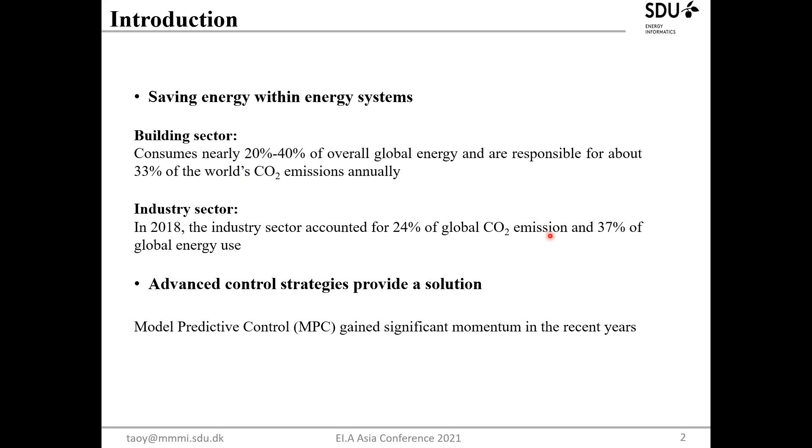to give some background of my PhD project, my project focuses on saving energy, and it has been spotted that buildings and industry sectors are large energy consumers and also release a large amount of CO2 emissions. In this regard, it is extremely important to increase energy savings for both sectors. Our approach will be using advanced control strategy, particularly model predictive control.

So what is model predictive control? I will give an example of building MPC, the model predictive control application in buildings. Consider that we are trying to regulate the temperature in the building and at the same time save energy. As indicated by the name of model predictive control, we will need a predictive model, which is also called the control model. And this model can accurately capture the thermodynamics of the building for a given optimization horizon of 24 hours.

For instance, at the current time step, the control model will predict the building indoor temperature for the next 24 hours. The optimizer will use the control model and constraints together with the cost function to formulate an optimization problem. The MPC optimizer will output the optimal control sequence to the actuator, which in our case will be the HVAC system, for the coming 24 hours. But instead of applying all the control sequence for the next 24 hours, it will only apply the first time step, which will be 1 hour.

And at the next time step, the measured temperature from the building will feed back to the optimizer, and the optimization will repeat. So basically, the characteristics of MPC are a predictive model, a rolling optimization, and a feedback correction.

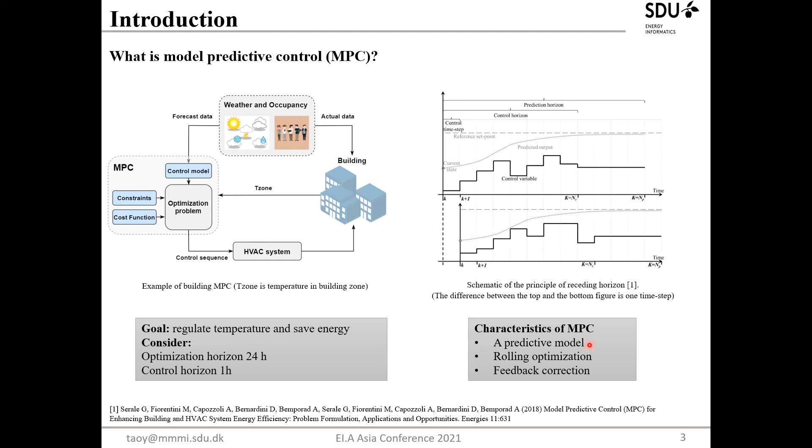Why are we using model predictive control? To mention the benefit of model predictive control compared to conventional control strategies, such as the PID controller: if we are using the PID controller, the system will only react when it reaches the unexpected condition. But for model predictive control, since we have a predictive model, we are able to predict future states, and the system can react in advance to avoid the unexpected conditions. This makes MPC extremely good at dealing with large scale energy systems with thermal inertia, such as buildings, big thermal storage tanks, and other industry energy systems.

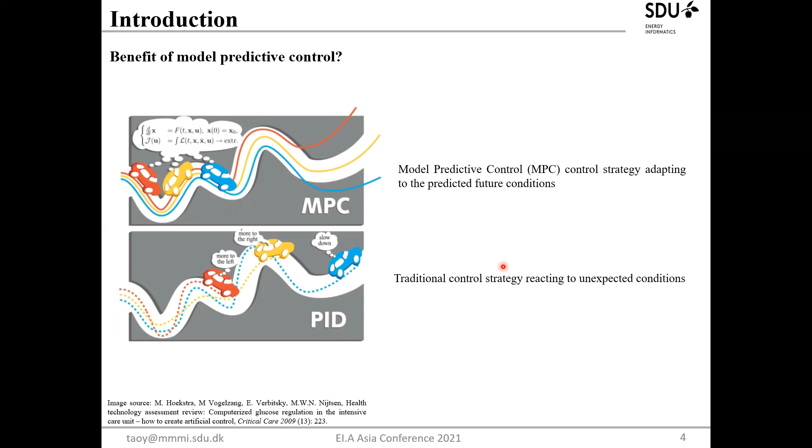In general, MPC implementation can be divided into 5 steps, starting from developing control models, defining the cost function, selection of the optimization techniques, and ending up with testing and commissioning of MPC. In these 5 steps, choosing a proper control model and optimization technique, these 2 steps are kind of hard, and they are normally chosen according to research experience. This fact brings up the research question for our project: is it possible to find the best optimization technique for a given type of energy system model?

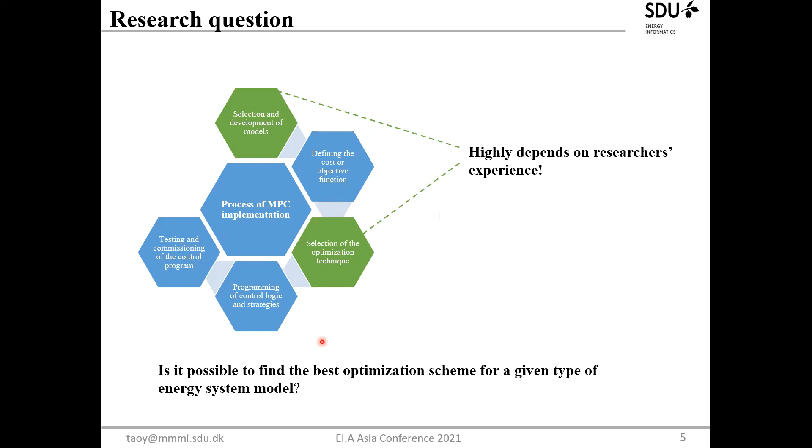To answer this question, we need to know the status of the research, the state of the art. What is the research status of MPC in combination with optimization techniques? Here we present the state of the art for one typical energy system, which is building MPC, rather than covering all the MPC applications in different energy systems.

In regard to building control models, they fall into 3 different categories: white box, grey box, and black box. White box is built based on the physics of the system. Black box is built purely based on statistical data, while the grey box approach combines those two. The grey box model is actually quite a commonly used control model for model predictive control, and in particular the RC network model, which is a resistor capacitor thermal network model for buildings, is quite commonly used. Here is a picture of RC networks of different orders.

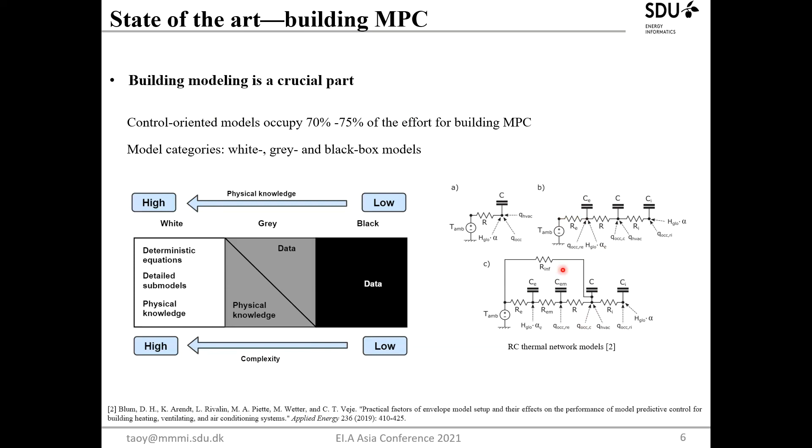As for the combination of MPC models with optimization techniques, basically the literature shows that for research studies, they use a specific MPC configuration applied in specific building energy systems. And there is still a lack of guidance on which MPC configuration will perform best in general. And these facts result in a slow transition between the wide research activity in academia and the real implementation in industry. The picture here covers all the aspects that need to be considered for building MPC.

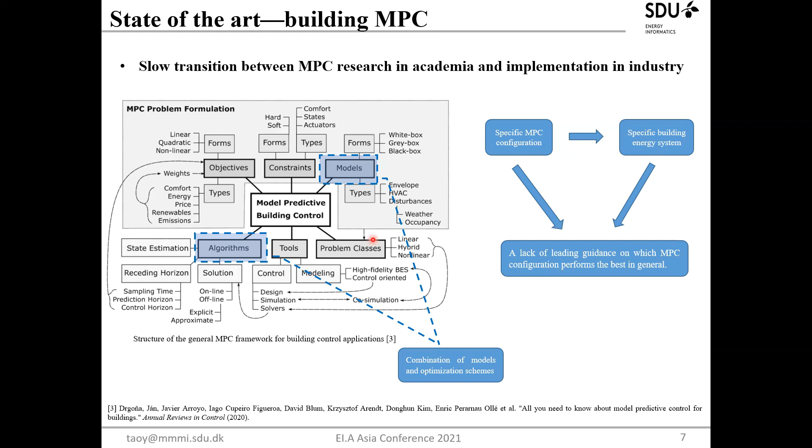Researchers have done a lot of work on different branches. However, in regard to the models and optimization techniques, there is still something missing. A systematic study on the combination of the models and optimization techniques is still missing. So to answer our research question, we will investigate 3 case studies for our project.

To start with, we will do first the building MPC. First of all, a comprehensive literature study will be done to map the control models, the optimization techniques, and their combinations, and also include the possible available KPIs for performance assessment as well.

Next step will be developing a building virtual testbed that enables us to make numerical experiments on. We will use this virtual testbed to test a matrix of model types and optimization techniques, and compare the performance using different KPIs. Following this step, a real MPC implementation in a real building will be carried out.

With the help of the 3 steps here, we expect a comprehensive methodology on how to choose models and the corresponding optimization techniques will be formulated. This methodology will be further applied in other 2 case studies, such as greenhouse and district heating networks.

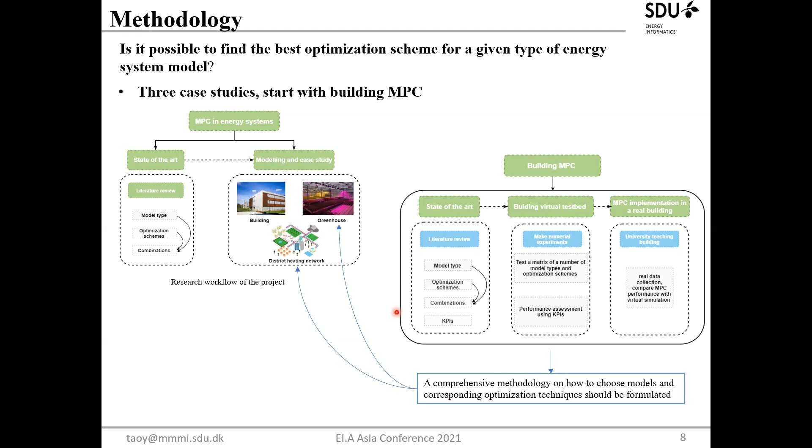So until now, one may ask, do we already have a building virtual testbed available to make numerical experiments on? The answer is yes. At SDU, we have a Python-based package called MShoot available, which is an open source framework for multiple shooting MPC in buildings. Under this framework, we can supply different control models, define different optimization techniques for solvers, and do the MPC simulation.

In order to test our models, the modeling approach for our control model will be using the Modelica language. We mainly develop grey box models using RC networks. And since it's a grey box model, we need to identify the system. In our center, we have another Python-based package called ModestPy that allows us to do the parameter estimation.

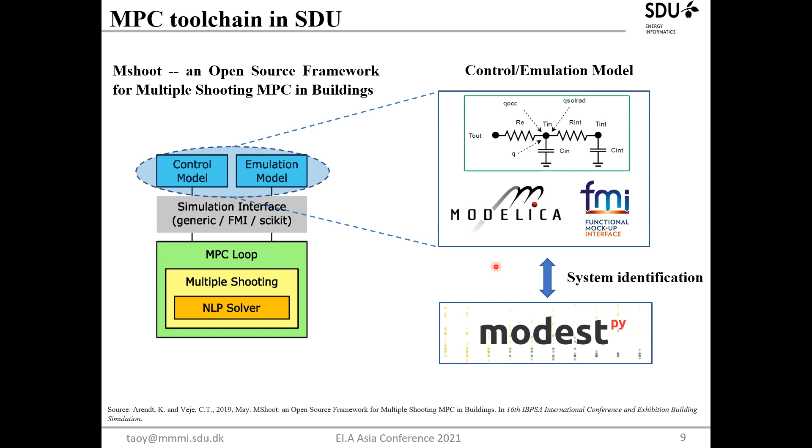Now I will show a demonstration of using this framework in an office building for building MPC. The office building is located in our university, Denmark, and it is equipped with radiator heating. We also have a bunch of sensors collecting different data, such as the window opening status, the indoor temperature, and the radiator temperature set point.

We built an RC model for the office building, which is shown here. This model is developed in Dymola with the inputs of solar radiation, outdoor temperature, occupancy, window opening status, and temperature set point for the room. The model will output the indoor temperature, and at the same time, it will compute the heat consumption for the room.

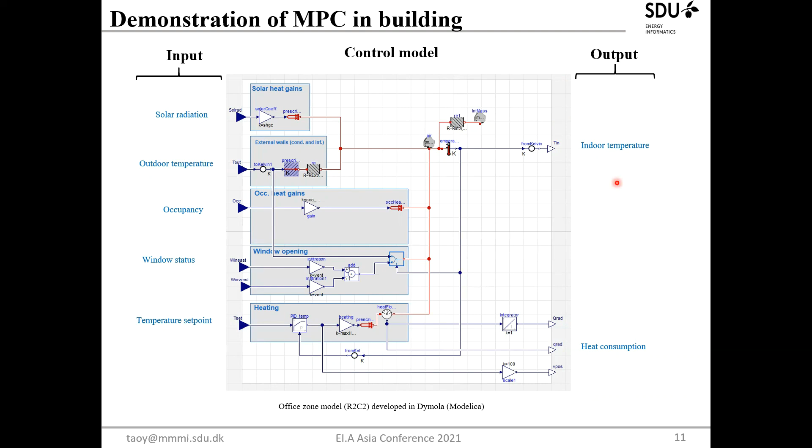This grey box model contains a set of unknown parameters, and we will use data collected from the office to do the identification. The model is trained for 5 days and validated on another 5 days, taken from the measurements of the office. We are using the ModestPy package, with a genetic algorithm to identify the system.

The identification validation result is shown on the right figure, and basically it shows that the simulated indoor temperature matches quite well with the measured indoor temperature, which means that the identified control model is quite accurate in terms of capturing the office thermodynamics.

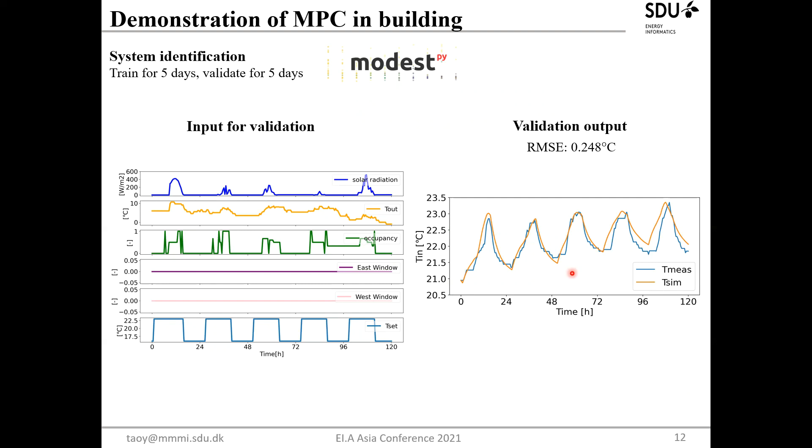Now the control model is available, it was subject to the MPC simulation with the MShoot framework. We try to minimize heating supply, while the optimization is subject to the system dynamics and also the maximum heating power constraint and the indoor temperature constraint. The 5-day MPC simulation result is shown here.

We also compare the MPC with a rule-based controller to show the performance, and it can be seen here that the MPC will preheat the room in advance to avoid thermal discomfort, and this results in less energy consumption compared to the rule-based controller, and at the same time less thermal discomfort.

So just to mention that the demonstrated virtual testbed can accept different control models and optimization algorithms, which enables us to systematically test the matrix of control models and optimization techniques. But there are also other platforms or frameworks applicable, apart from MShoot.

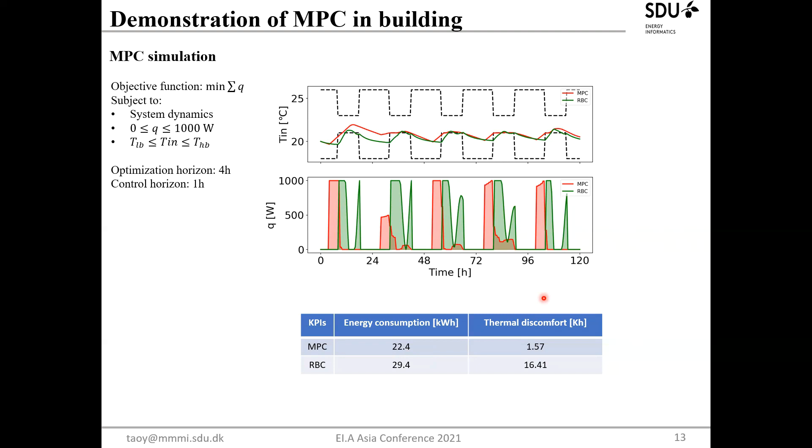For instance, there is one ongoing project, IBPSA Project 1, which I am partially involved in, and under this project, one of the subtasks is to develop BOPTEST, a framework for simulation-based testing of advanced control strategies in buildings.

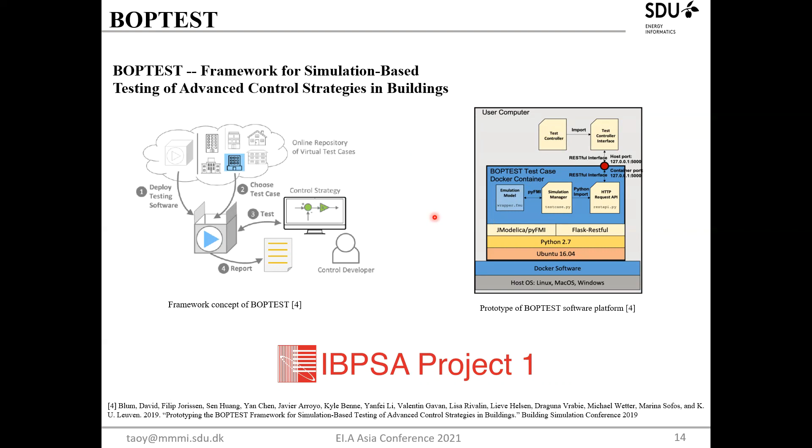And to summarize the PhD project: basically, our goal is to develop a methodology of finding the best model and optimization technique combinations for MPC application in different energy systems, and with the help of MShoot or BOPTEST, we hope the goal will be achieved.

The contribution of the PhD project will be speeding up the transition between the intensive MPC research activities in academia and the real application in industry.